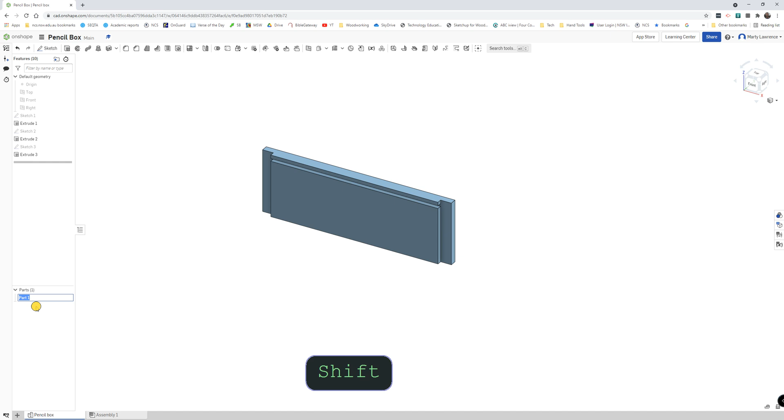Now over here in the timeline, and then underneath the timeline we've got this. These are our parts, so that's our first part. We're actually just going to rename that by right clicking, rename, we call that a side. And I have renamed the tab down here. You don't have to, but I renamed mine to pencil box.

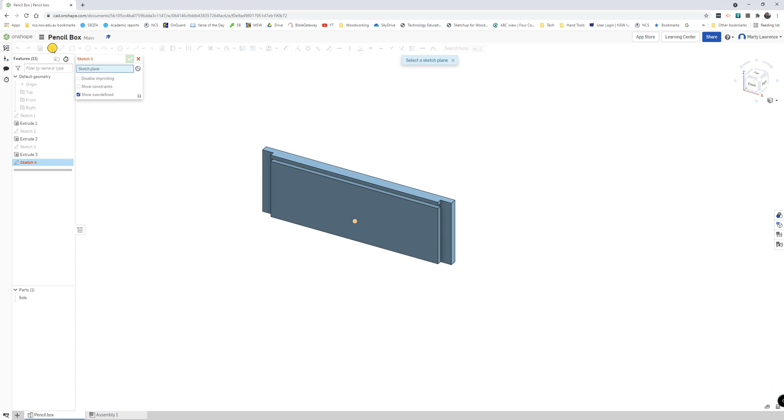So to draw the ends, we create a sketch. We click the sketch button. Where do you want to form the sketch? We're actually going to click on that rebate, so hover your mouse over that rebate there and click. I'm going to right click and go view normal to sketch plane, so we're looking straight down on it.

I'm going to draw a rectangle. The rectangle needs to start in this corner and end at this corner. So hover over the corner, make sure you get that little corner indication, the little square, click once. Now move down to the opposite little corner here, click again. Sizes are already correct, so in fact we don't have to do anything there. And tick. Now we're going to view that back at 3 dimensions.

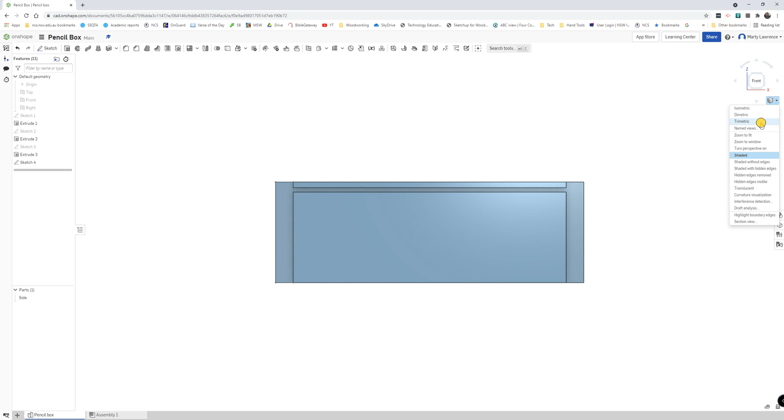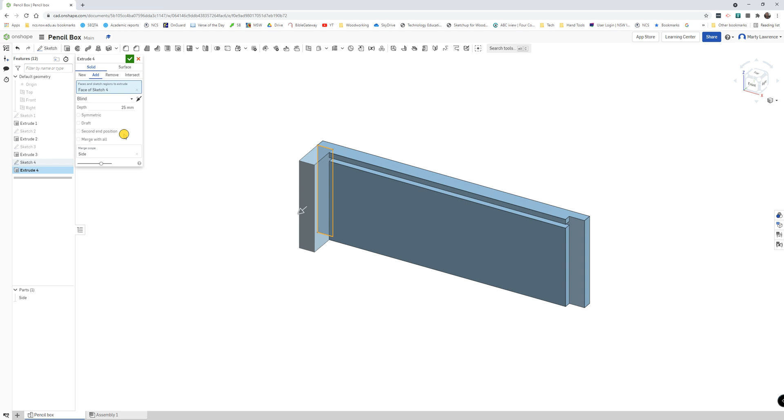I'll zoom backwards a bit. And we're going to use an extrusion, we're going to extrude. What faces or sketch regions do you want to extrude? Well, we've got to click on this new little rectangle that we drew here, so click once, and it's going to move out. We need it to move out a distance of 85, and press enter.

But what we're going to do, that's adding that to that part, so that would become one part. We actually don't want that, we want it to be a new part. So select new over here, and it should preview as a different color, and tick.

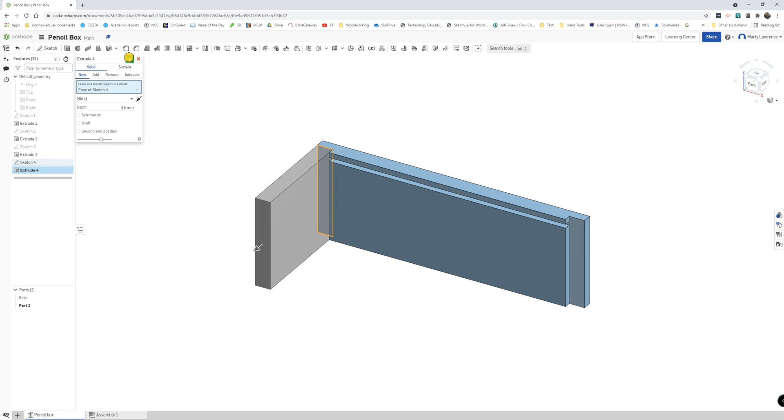And there's one of our ends. What's missing from this end? Yes, the groove. So we're going to draw the groove in.

And before we do that, let's rename this new part. Right click, rename, just call it end one.

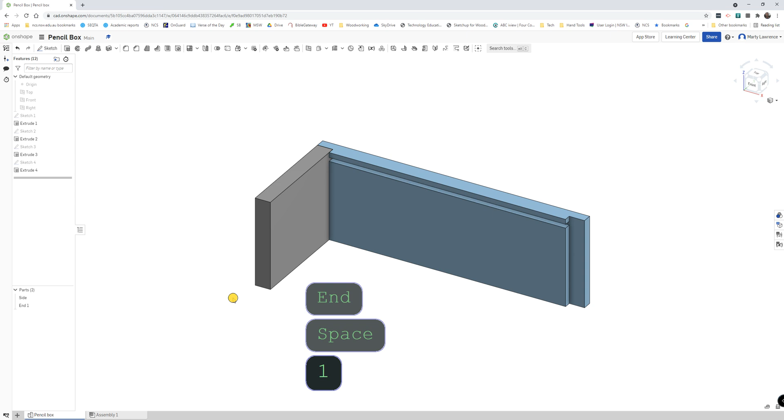Now to draw the groove in here, this object will actually be in the way, so we can just hide that for the moment. Down here in the parts, click on the little eyeball and it'll hide it, so we don't see it. It'll be easier without it there.

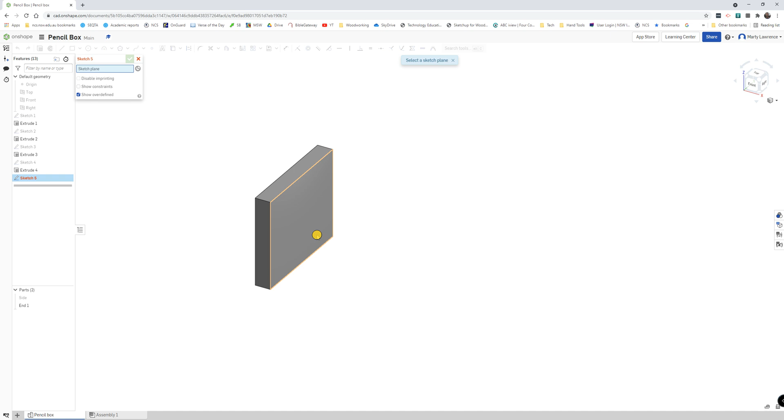I'm going to click sketch to create a new sketch, and we want to click on this face. We want to select that face, so click once. Let's view that front on, so right click, view normal. Just going to zoom it in a bit.

We're going to select the rectangle tool. Don't start the rectangle in the corner, just up close on that edge, click once. Click again on the other edge.

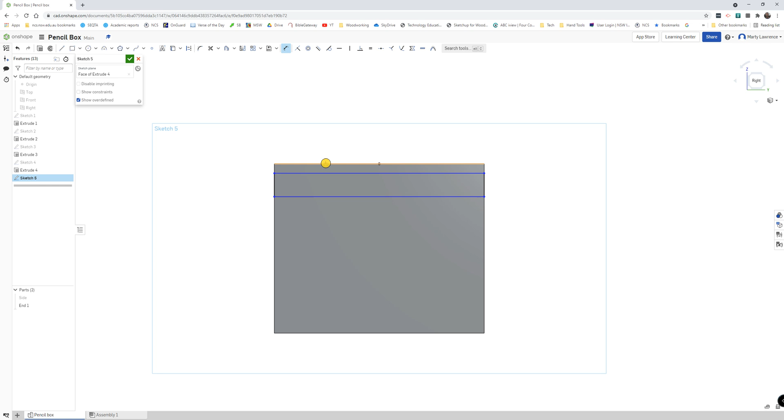And now we're going to choose the dimension tool. Dimension, do you remember the sizes? Click once, click again, and set this to 4. And from here to here, we're going to set that as 3.

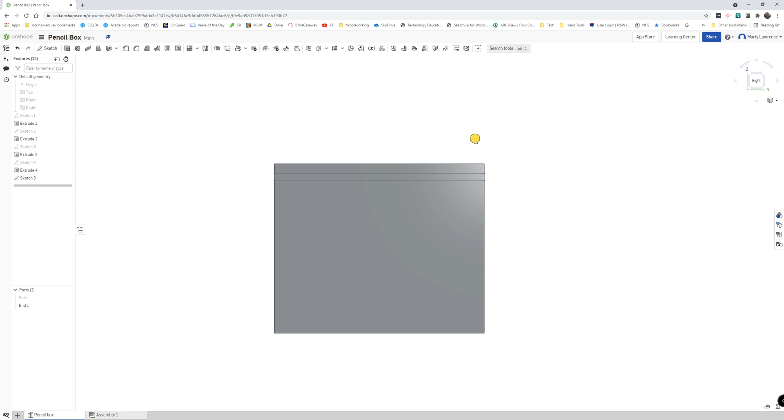Do you remember what happens next? So that sketch is complete, so we can tick that. We can go back to a 3D view. If you guessed that we need to do an extrusion, you are correct.

So click the extrude button. What do you want to extrude? This rectangle. Now it's trying to add, we don't want to add, we want to remove. And the distance is 5.

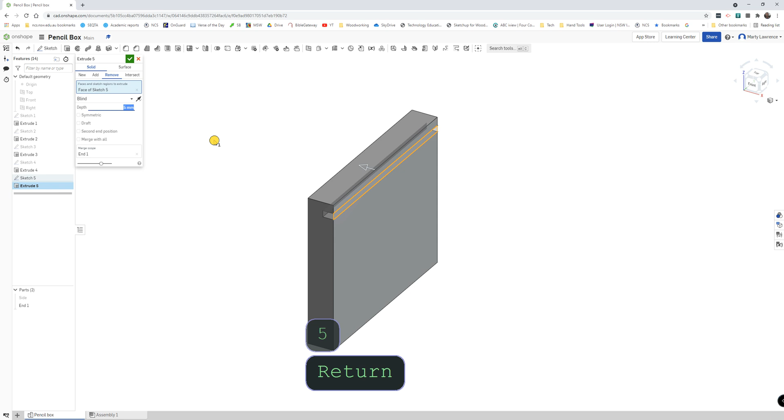So have a look at the preview, make sure it looks right. It should look like this. When you're happy, tick. There we go, that's one of our ends drawn in place.

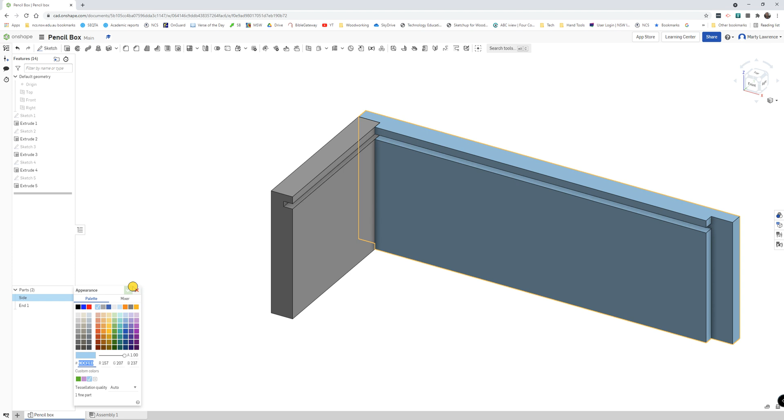We can turn that part back on. At this point, you may also, I'll show you this, if you right click on each of the parts and go to Edit Appearance, you can change the colors. So you can change that to whatever you like. I'm happy with that being grey and blue. And tick when you're done.

So I could do the same for the end, Edit Appearance, choose a new color, tick. That's it for this video. We'll do the other end in the next video.